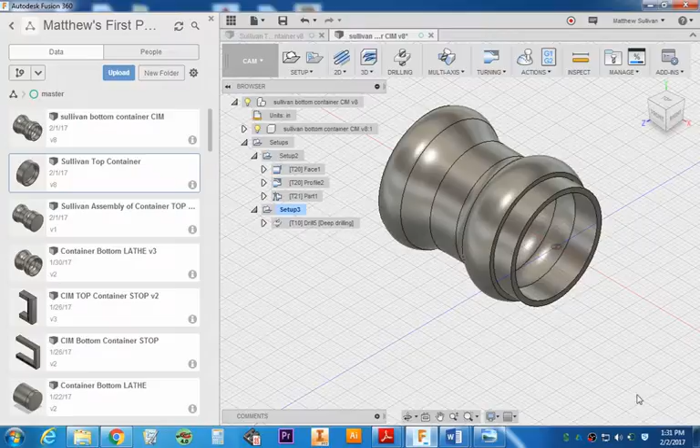Welcome back. This is going to be our last machining operation for the mill. We already completed our drilling operation, and we're going to complete our pocketing operation next. The drilling is going to give us a little hole for us to mill around, so we don't damage or break a tool. We're going to start switching between our visual settings.

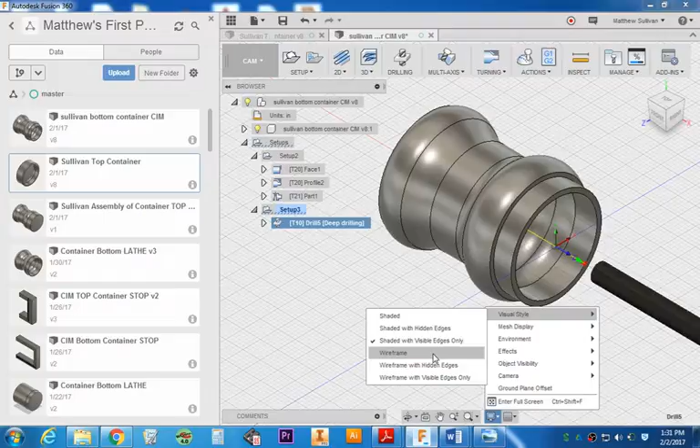One of the things you want to do is switch it over to wireframe and kind of inspect this part after our operations to make sure that we're not going to be drilling all the way through this part. We just want to be drilling down to the bottom here and coming back out, and this looks pretty good.

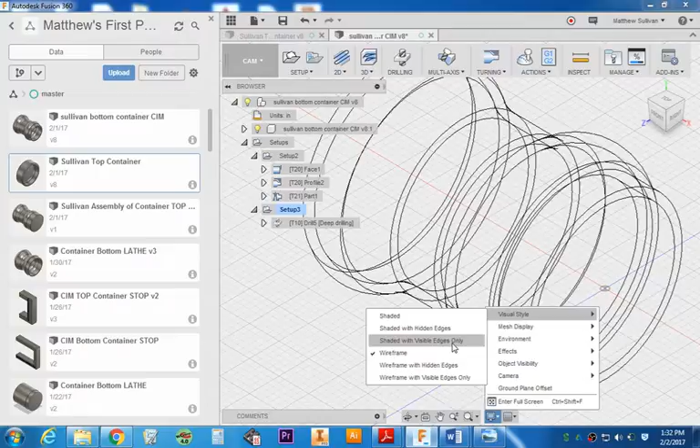I'm going to select the corner here. We're going to go ahead and mill this all out. So I'm going to flip it back to our visual setting, shaded with visible edges only. That looks good. That's our standard setting. We're going to mill all the way down to this bottom feature. If we select the entire right side of this, we're going to mill a diameter of this part right here, the smallest diameter that we can mill.

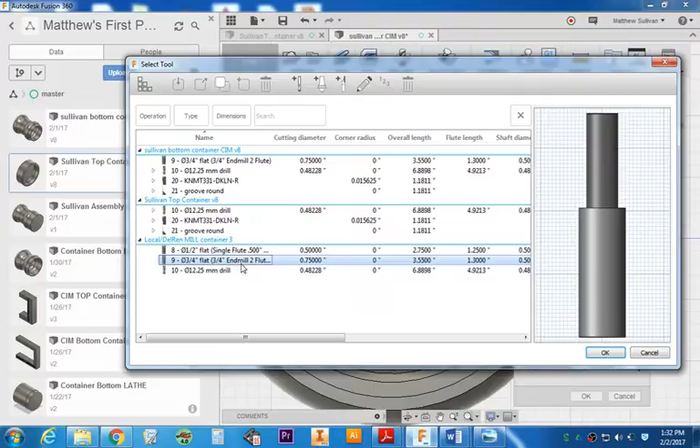So we're going to first go to 2D adaptive clearing, and we're going to select the tool. You can do the number 9 or the number 8 tool. The 8 is the 1/2 inch single flute end mill; the 3/4 inch will work. It'll cut a little bit faster and it'll cut a bigger area. So you can go ahead and select the number 9 tool, select OK. After you've selected it, make sure coolant is disabled, and we're going to flip through these.

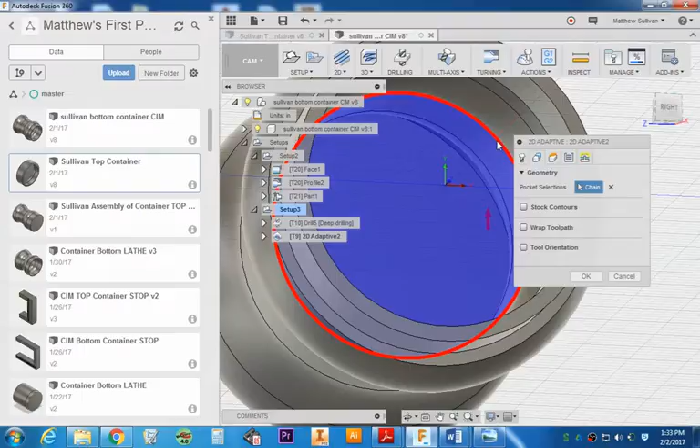For the geometry, I know it's going to be really difficult to tell what line I'm grabbing, but I'm actually grabbing right here, and it isn't the very bottom of it. It's the smallest inside diameter. You have to grab the smallest inside diameter. There's not an option to it.

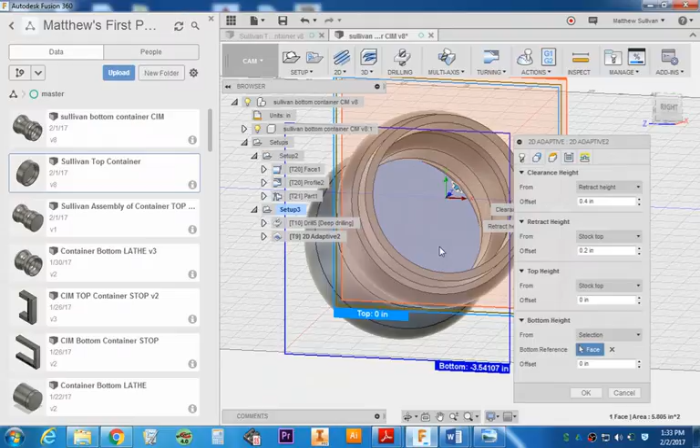Then over here for our depth, we're going to make a selection and select the very bottom of this. You can just select this line or that very bottom face. It should now cut this entire feature away from the top all the way down to the bottom. We may also have to set the stock top, which is predetermined, but we might need to make a selection and do model top, or even select this top feature. I don't think we're going to need to worry about that, but you can go ahead and do that.

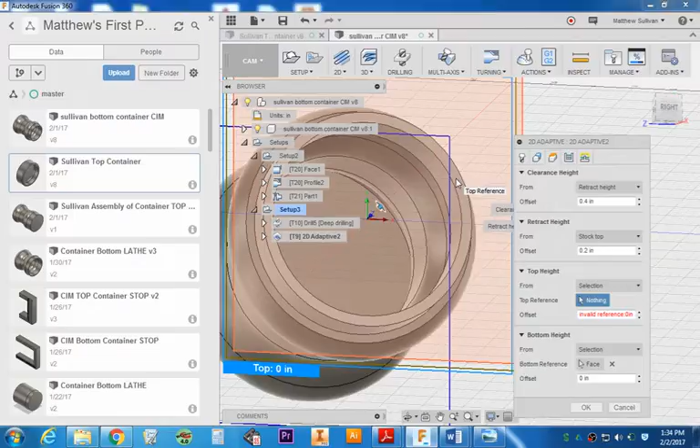So we have the top selected and the bottom selected, because we need to mill all that out. For stock to leave, we're not going to do any, but we are going to do multiple depths. And 0.400, we want to do about half of the diameter of the mill.

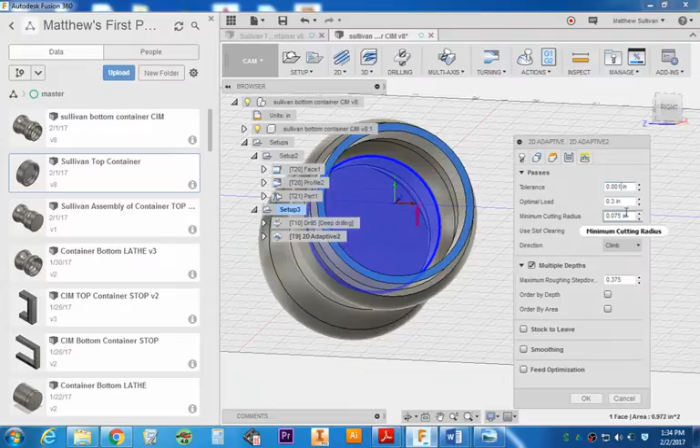0.375 is a pretty good number to cut out. For tolerance, we should change the 4 to a 1, so it's 1/1000th tolerance. Optimal load is 0.3, that looks good. Cutter radius is 0.075, no stock to leave, and linking. I'm pretty happy with the helix, the 2-degree ramping angle. All this stuff looks pretty good.

So I'm going to go ahead and minimize this, click this, and select OK. Now let's see what ends up happening.

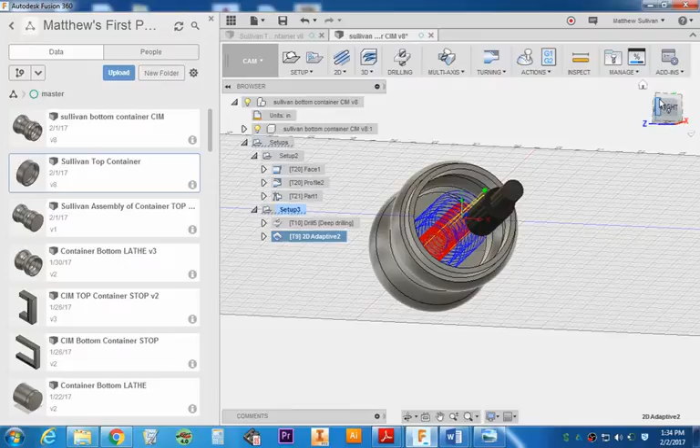We're going to go through and mill out this entire section, every single step down, the whole way down. It looks like the first cut might be a little bit deep, but let's take a look at this. The only way to really determine what's going on inside is to go back to visual settings, go back to wireframe, and select this.

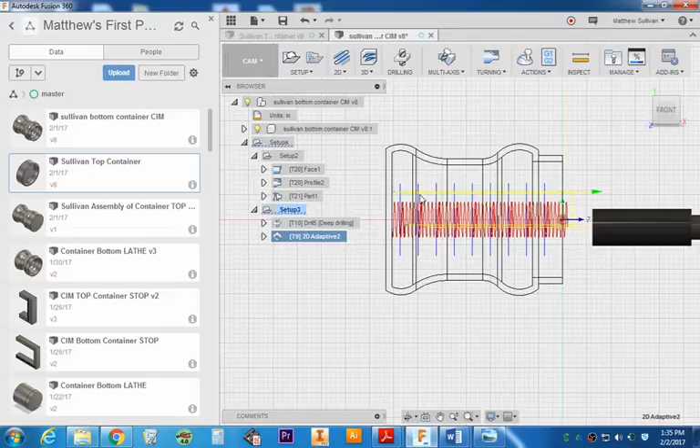These all look like they're about 0.375 apart, all equidistant. And then there's a final operation at the very bottom, and it looks like it's going to completely clear this all the way out.

It also doesn't appear right now that it's going to be cutting away too much on this inside. We didn't select these contours, so we're not going to cut out all this material. It looks good - you kind of have to do this in order to determine if our cutting is going to cut away too much of the material.

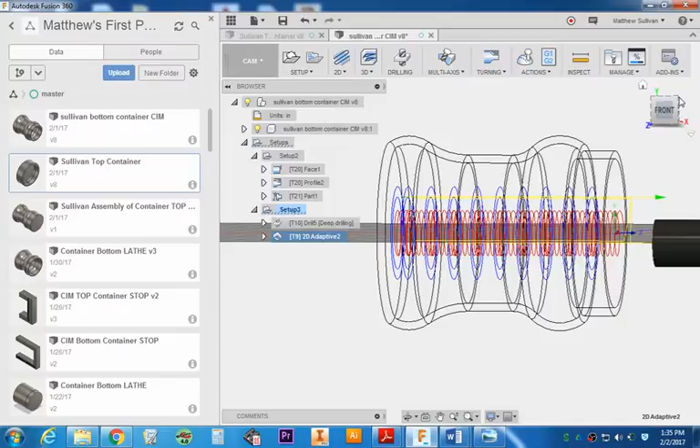The next thing you're going to do is a simulation. You're probably going to want to do 2 simulations. One, we're going to take off the toolpath and turn on stock, and play this all the way through. You can increase the speed.

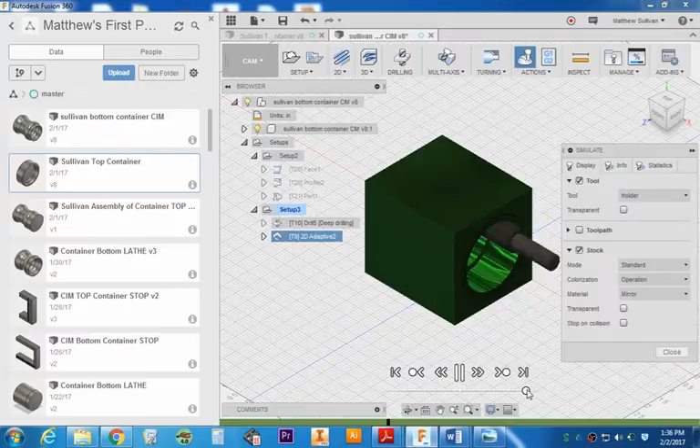Determining what we have, you can kind of see that we just barely cut away - we're just right at that line. We didn't leave any stock. From what I'm seeing right here, it doesn't look like we're cutting into the material at all.

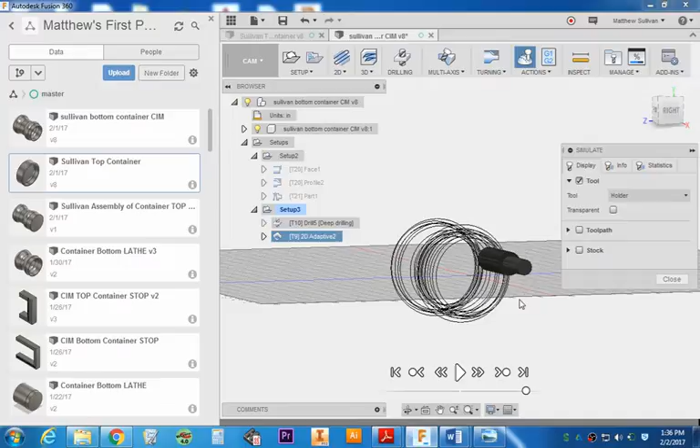It looks really good. If you want to go ahead and do another one with no toolpath, and maybe click the toolpath on and play it through, so you can kind of see like, okay, well, right about here, are we cutting?

Are we gonna hit anywhere in here? Are we gonna hit the side of our part? It doesn't really look like it. So we're right in here. I think that we're pretty good.

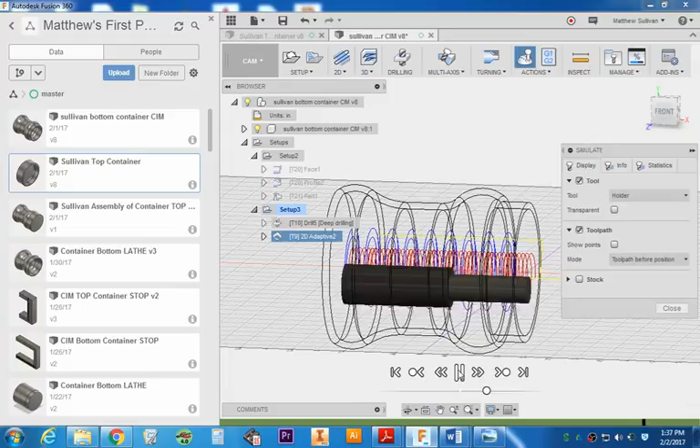Let's slow it down a little bit more. It doesn't really look like we're going to end up hitting this side of the part, but it's always good to do a full inspection here and determine if we're going to hit. It looks like we have a little bit of clearance still, and it's just going to go ahead and cut this whole thing out.

So it's always a good idea to go through and just inspect what each of these cutting paths is going to look like and make sure we're not going to hit, like right here, I think we're going to be pretty good. You kind of see that the tool is just right on that line. We're not over that line out here, so we should be in pretty good shape.

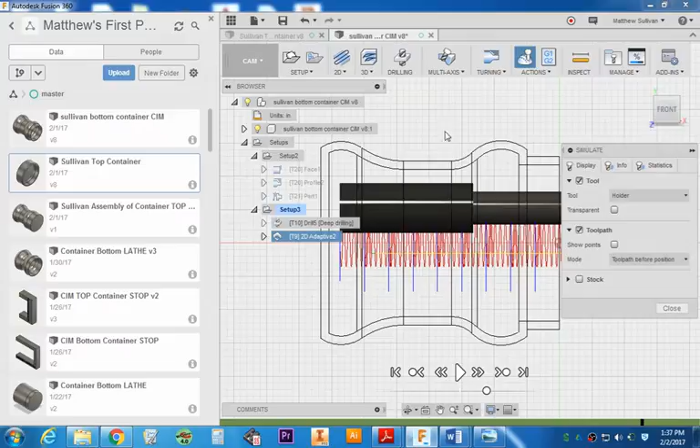That's all you're going to do today. Once you're done, you can flip it up, hit Control S to save it, and that is all we're going to go over today.